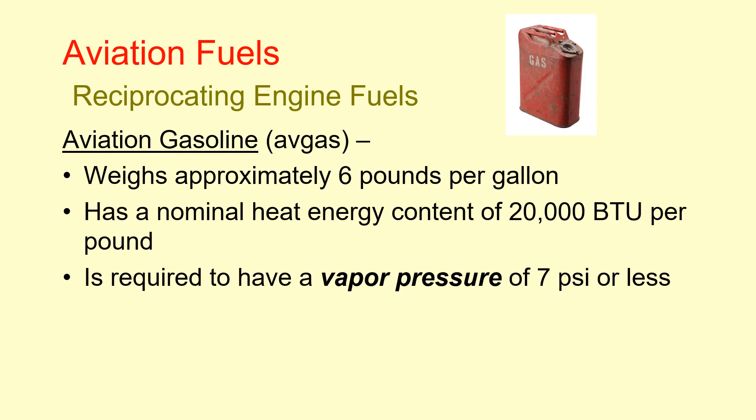Volatility is the measure of a fuel's ability to change from a liquid to a gas. 100 low lead has a vapor pressure of 7 pounds per square inch or less at 100 degrees Fahrenheit. Jet A has a vapor pressure of less than 1/10 of a pound per square inch, and Jet B has a vapor pressure between 2 and 3 psi at 100 degrees Fahrenheit.

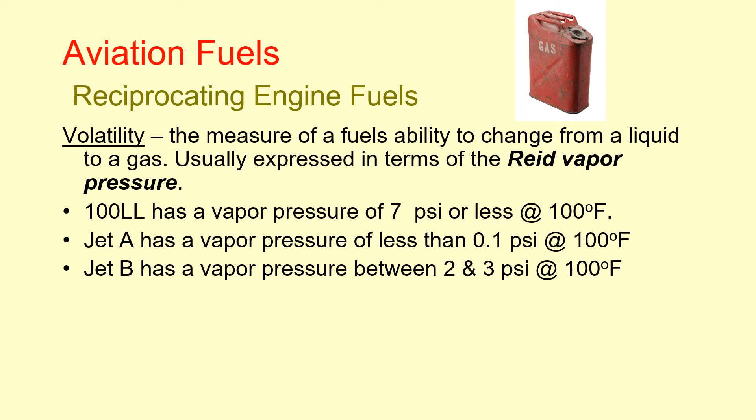Vapor pressure is the pressure of a vapor above a liquid required to prevent the liquid from releasing additional vapors. If the vapor pressure of a fuel is too low, vapor lock may occur. If the vapor pressure is too high, the engine may be hard to start, particularly in cold weather.

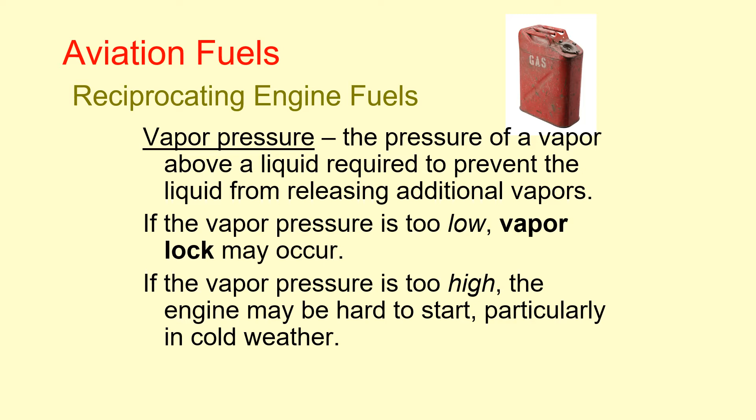Vapor lock is a condition in the fuel system in which the fuel has vaporized and formed pockets of gas in the fuel, preventing liquid fuel from getting to the engine. Vapor lock can occur when the fuel gets too hot or the aircraft climbs high enough that the air pressure above the fuel drops low enough to allow the fuel to vaporize.

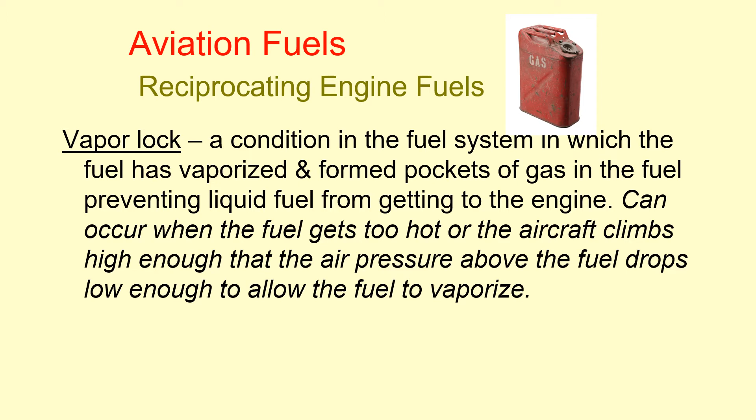The minimum octane rating approved for any engine can be found in the type certificate data sheet for that engine. The octane rating is a measure of the resistance of that fuel to detonation. Some fuels have two octane numbers, such as 100/130, where the first number is the aviation octane rating with a lean mixture, the second number is that with a rich mixture.

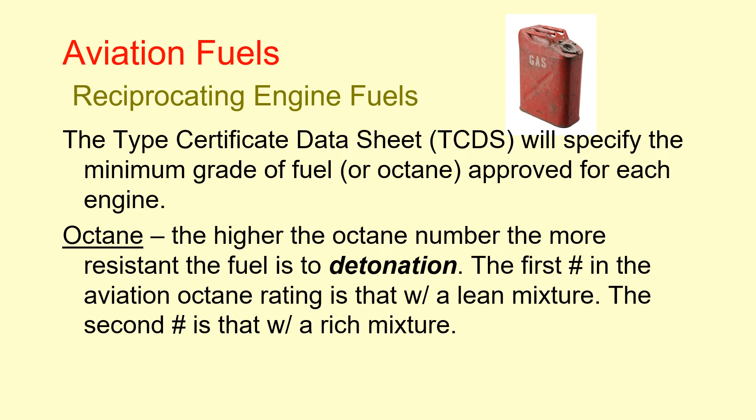Detonation is an explosive burning of the fuel-air mixture inside the engine cylinder when the mixture reaches its critical temperature and pressure. Detonation causes a rapid rise in cylinder pressure, excessive cylinder head temperatures, and a decrease in engine power.

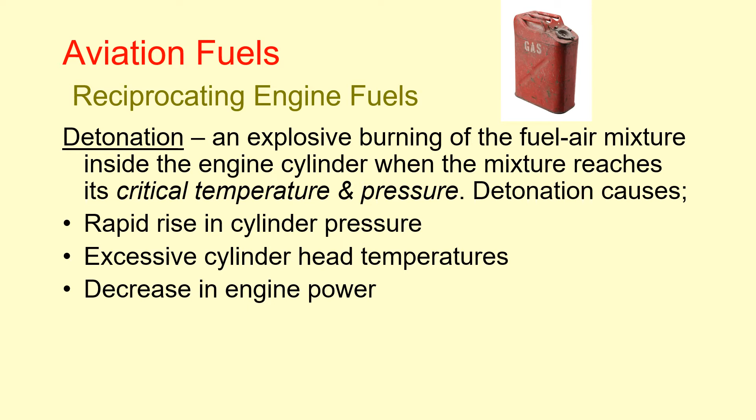Different grades of aviation fuel can be differentiated by the color of dye added to the fuel. For example, 100 low lead is dyed blue.

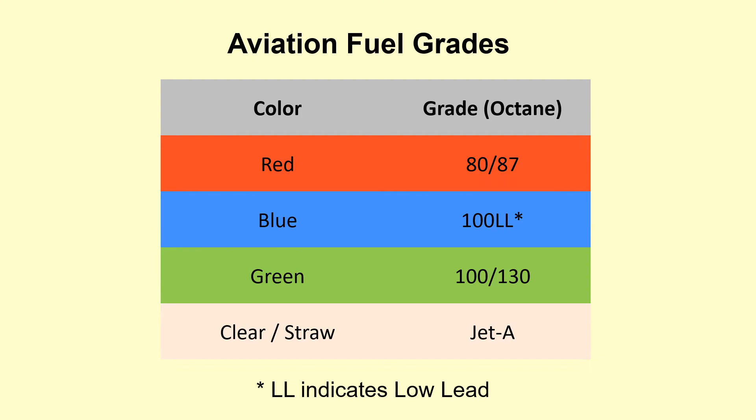Pre-ignition occurs when the fuel-air mixture within the cylinder head ignites too soon. It is caused by residual hot spots in the cylinder that may be a small carbon deposit on a spark plug, a cracked ceramic spark plug insulator, or almost any other damage in the combustion chamber. It may occur simultaneously with detonation, and like detonation can cause engine roughness and high engine temperatures.

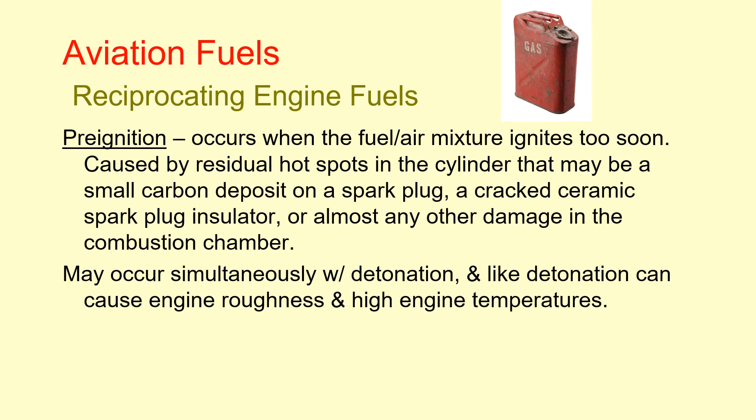Fueling hoses and valves are often color-coded to identify the type of fuel they are carrying.

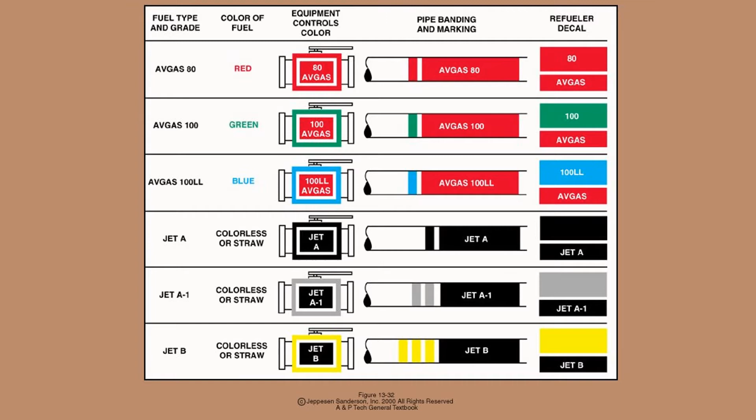Isooctane is a hydrocarbon fuel used as the reference when rating the anti-detonation characteristics of avgas.

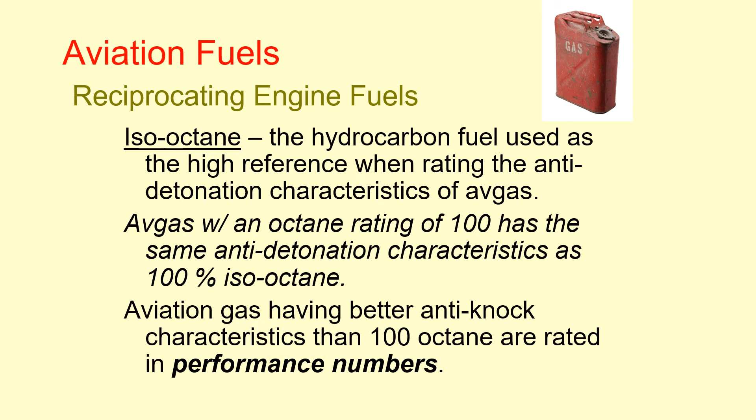Tetraethyl lead is added to avgas to improve its anti-detonation characteristics. It is, however, poisonous, leaves lead deposits inside engine cylinders that foul spark plugs and cause corrosion. Ethylene dibromide is added to avgas to help remove these deposits.

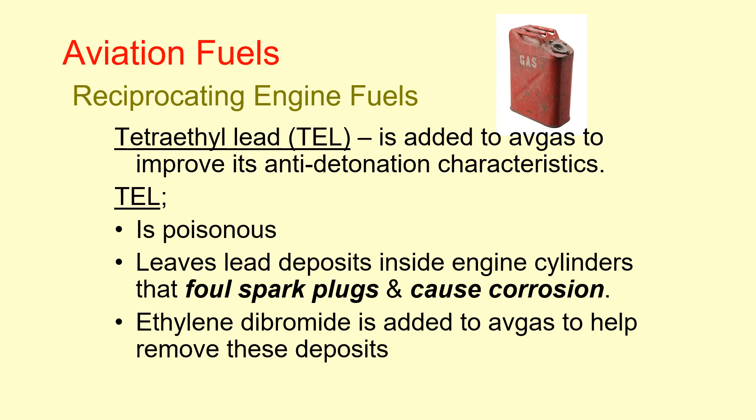If any reciprocating engine fuel tanks have had turbine engine fuel introduced into them, they, along with all of their associated valves, lines, and strainers, must be drained and flushed.

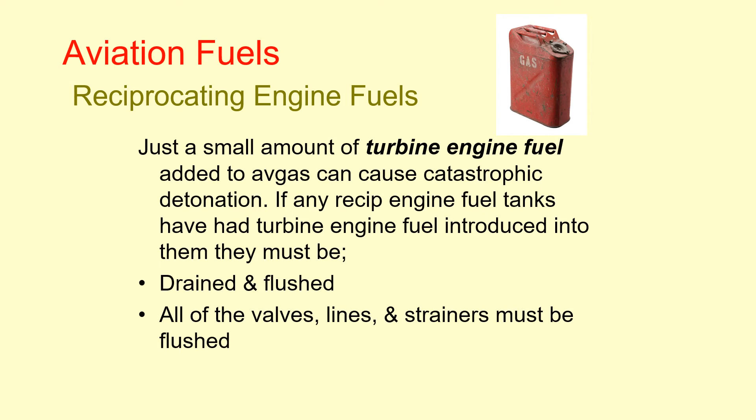Any reciprocating engine that has been operated while its fuel was contaminated with jet fuel must have its cylinders inspected for internal damage with a borescope, the engine must be compression tested, and the oil must be changed and the oil filter inspected for contaminants that could result from detonation.

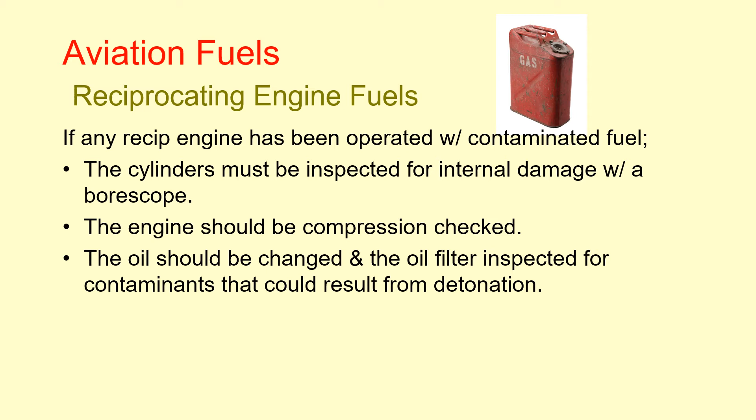The FAA has approved some supplemental type certificates that allow some older aircraft to operate on automobile fuel.

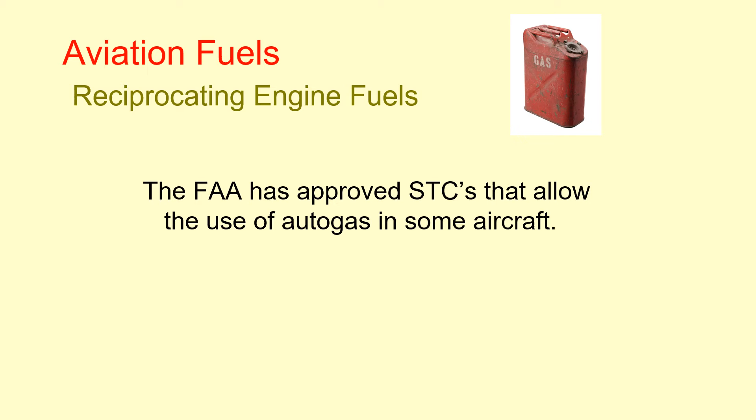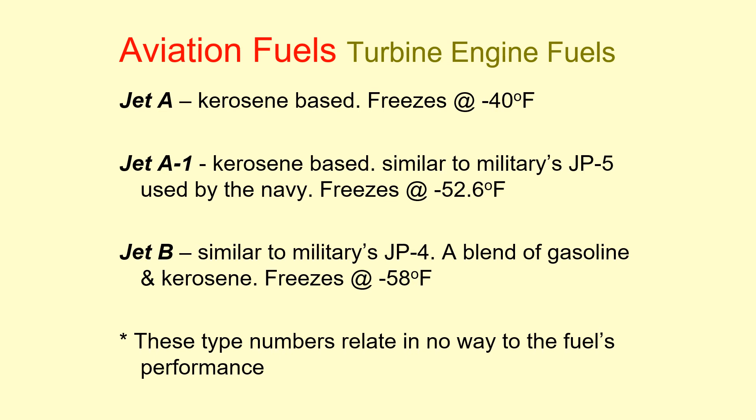There are in general 3 different types of jet fuel in use. Jet A and Jet A1 each weigh approximately 6.7 pounds per gallon and have a nominal heat energy content of 18,500 BTU per pound.

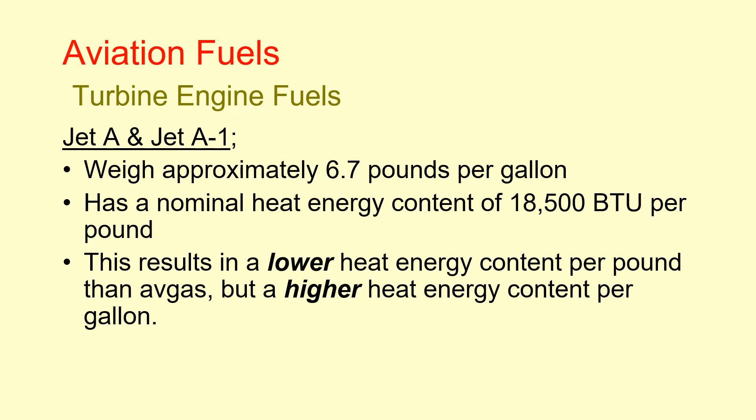Because they have a higher viscosity than avgas, jet fuels more readily hold contaminants. The most prevalent contaminant is water, which exists in 2 forms, dissolved and free water.

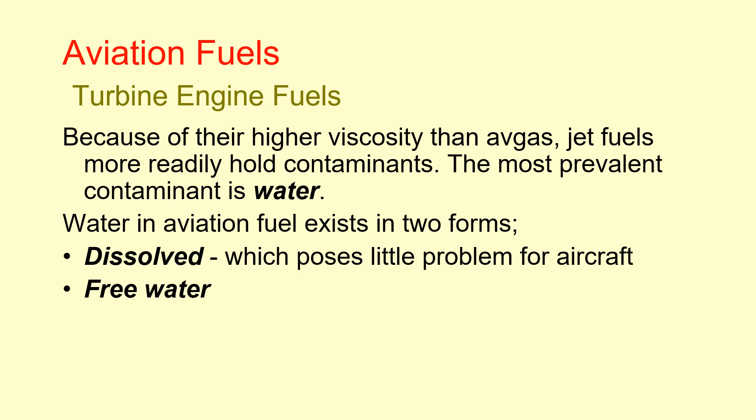Free water exists in 2 forms: a water slug, which is a large body of water ranging in size from less than 1 pint to hundreds of gallons, or entrained water, which is water suspended in tiny droplets caused by the agitation of fuel and water slugs.

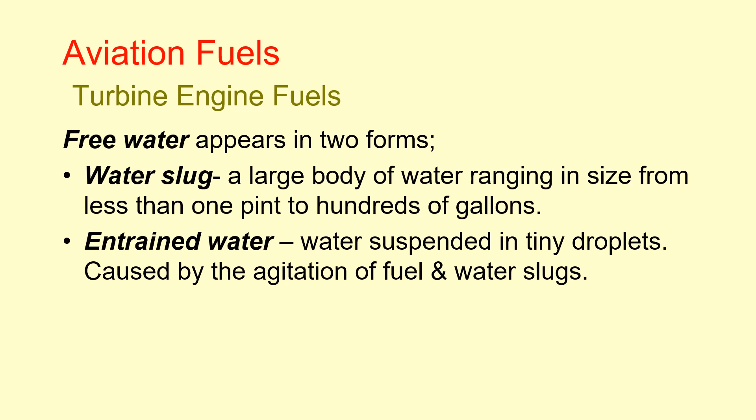Water-contaminated fuel causes several problems in aviation. First, it can replace or dilute fuel in combustion chambers, resulting in engine failure. Ice crystals can clog fuel lines and filters, and it supports the growth of microorganisms.

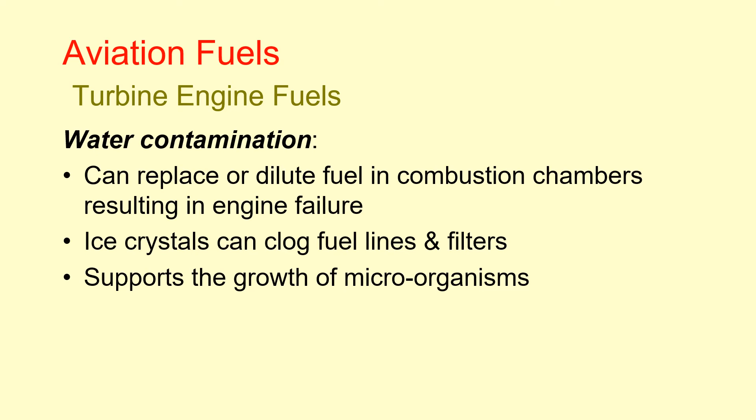The problems created by ice crystals in water-contaminated fuel are reduced by filter heating devices and fuel additives such as Prist, which lowers the freezing point of the fuel.

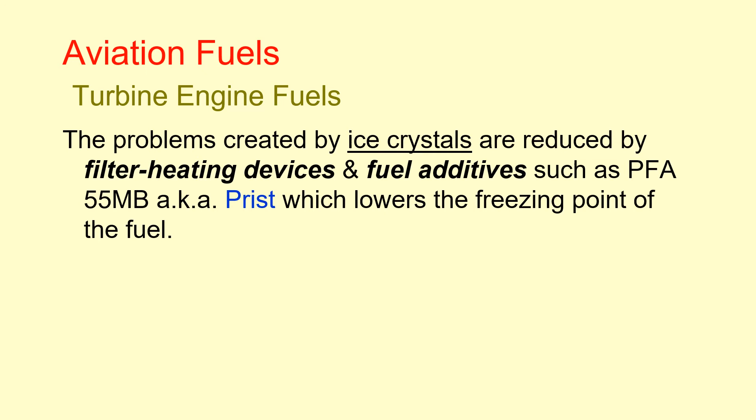Microorganisms that grow in water-contaminated fuel create 2 main problems. First, they form a sludge or slime that can foul fuel filters and fuel pumps. Second, they entrap water against the sides of the aluminum fuel tanks, causing corrosion.

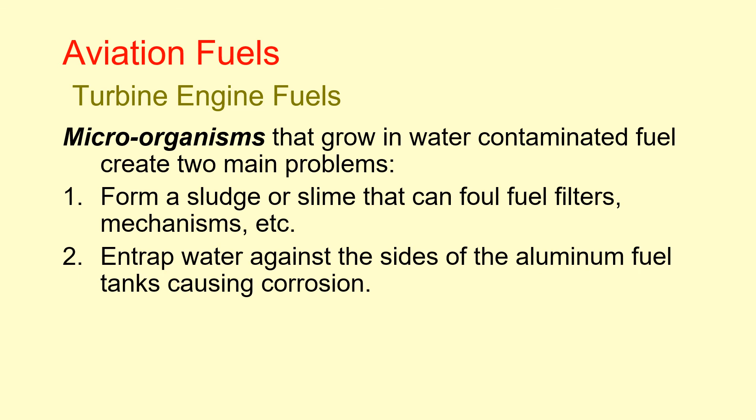The fuel additive Prist, which lowers the freezing point of the fuel, also acts to destroy microorganisms which contaminate the fuel.

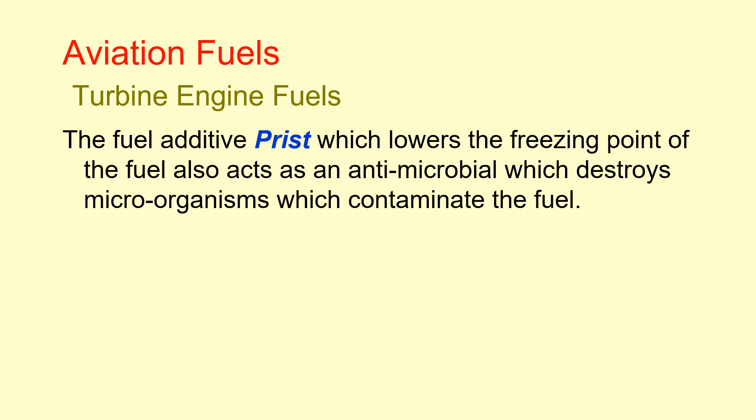The easiest way to reduce solid contaminants such as rust, scale, sand, and dirt is to limit their introduction into the fuel in the first place.

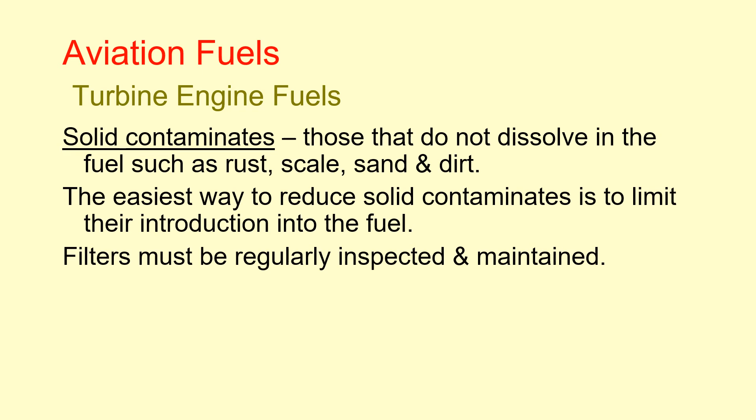While we may never operate a reciprocating engine contaminated with jet fuel, turbine engines can usually be operated on a limited basis with avgas. The avgas, however, does cause 2 problems when used in turbine engines. First, the tetraethyl lead in avgas causes deposits to form on the turbine blades, and second, avgas does not have the same lubricating properties of turbine fuels.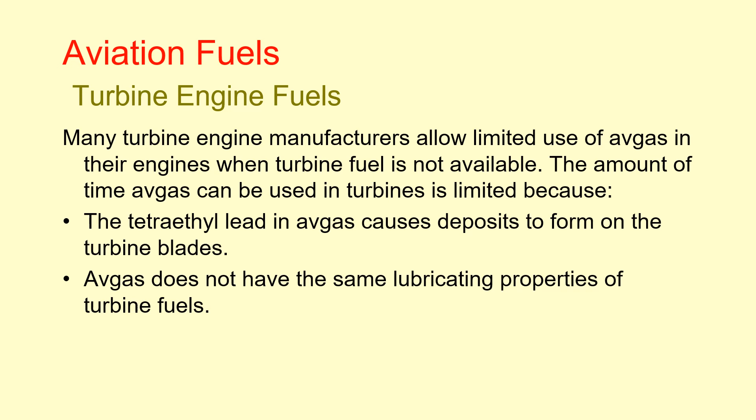If fueling an aircraft using a truck, be sure to park the truck in a manner such that should the brakes fail, it is not likely to roll into the aircraft. Then set the brakes and chock the wheels.

Ensure that a CO2 fire extinguisher is readily available. Ground or bond the aircraft to prevent the likelihood that static electricity may ignite the gasoline fumes. Ensure that all aircraft electrical systems and electronic devices, including radar, are turned off.

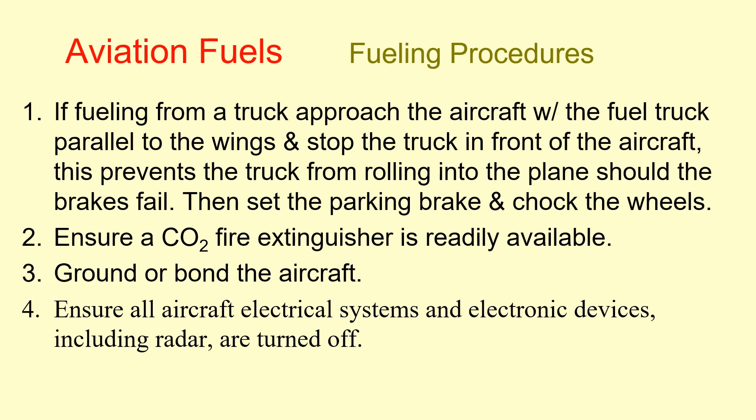Additionally, do not carry anything in your shirt pockets that may fall into the fuel tanks. Ensure that we are using the proper type and grade of fuel, and take precautions to reduce the likelihood of the fuel being contaminated by dirt, dust, or other contaminants.

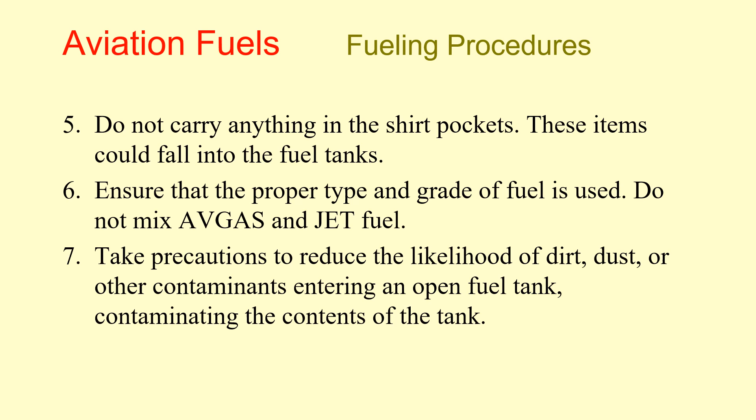Do not fuel an aircraft when there is lightning within 5 miles. Do not fuel an aircraft within 500 feet of operating ground radar. And check the fuel cap for proper installation and security before leaving the aircraft.

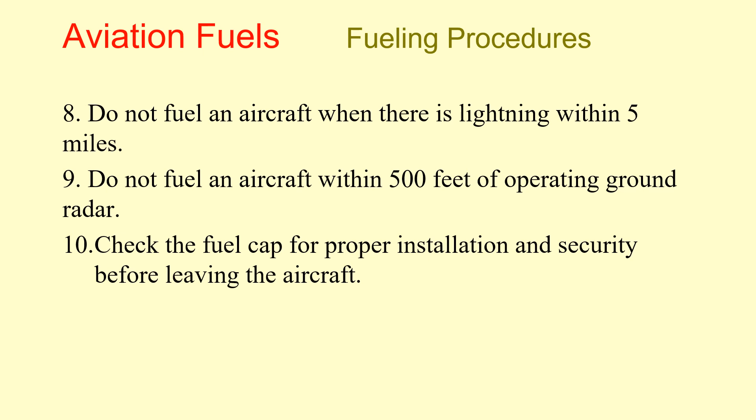All fuel tanks on reciprocating aircraft are required to be marked near the filler opening with the word Avgas and the minimum permissible grade of fuel. The capacity of the tanks may not be required by the Federal Aviation regulations, but they may be required by the type certificate data sheet for any particular aircraft.

Federal Aviation Regulation 23.973 requires that the fuel tank openings in reciprocating engine aircraft not allow a nozzle used for jet fuel to fit into the opening.

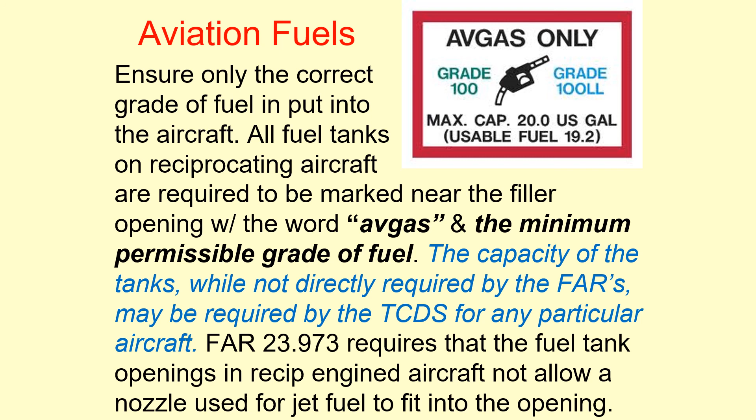When pressure fueling, the maximum permissible fueling supply pressure and the maximum permissible defueling pressure are marked on a placard at the fueling control panel.

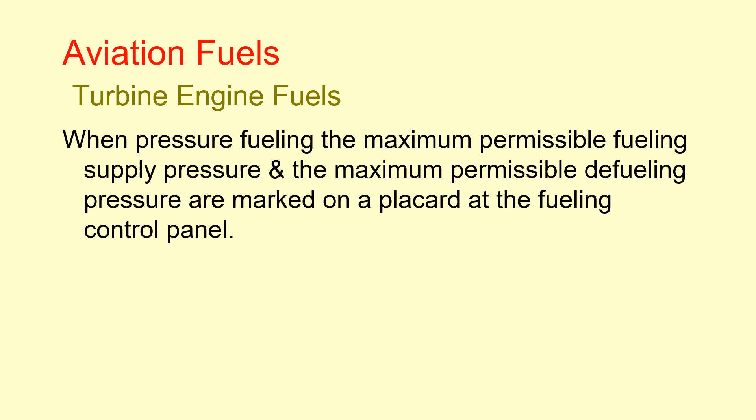Aircraft should always be fueled outdoors in well-ventilated areas and never inside a hangar.